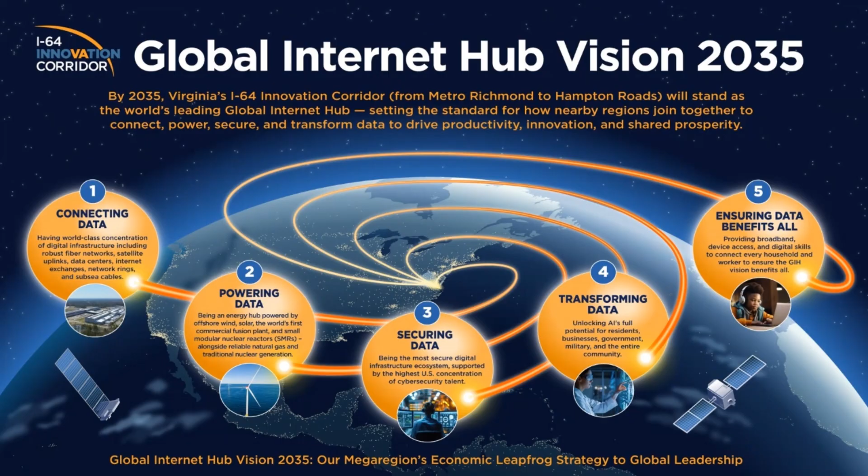Our top priority is to spearhead efforts to have the I-64 Innovation Corridor designated as a global internet hub. Our plan is a bold and innovative approach to harness a once-in-a-generation opportunity to transform the future of the Richmond region and Hampton Roads. In November, we unveiled our leapfrog strategy, which we call the Global Internet Hub Vision 2035. This vision is the future of the I-64 Innovation Corridor. The plan showcases where and how the world's data connects, how it powers up, how it stays safe, and how it transforms and benefits everyone.

On the other side of this map plan is why our leapfrog strategy is so very important. It's because today, comparison regions are outpacing us in GDP growth - gross domestic product growth - across all sectors. Regions with strong digital infrastructure consistently outperform the U.S. average in innovation and competitiveness. Digital infrastructure is a major driver of productivity and GDP growth. Our leapfrog strategy is not just to catch up, but to move ahead. Standing still means falling further behind.

We also are advancing the Global Internet Hub cause in many other ways, such as by generating earned media, writing letters to members of the General Assembly, and placing op-ed pieces. We also created an online digital infrastructure and data center information hub. This resource center seeks to offer clear, accessible insights and information into the digital infrastructure ecosystem to better equip local leaders, stakeholders, and the public to engage with and help guide this very vital sector.

You can check out the Resource Center at globalinternethub.org/resourcecenter. We're also showcasing the positive economic ripple effects of data centers by creating short videos of executives and industry leaders in Virginia talking about the economic ripple effect throughout the economy. You can watch these three videos on our website under Beyond Data Centers.

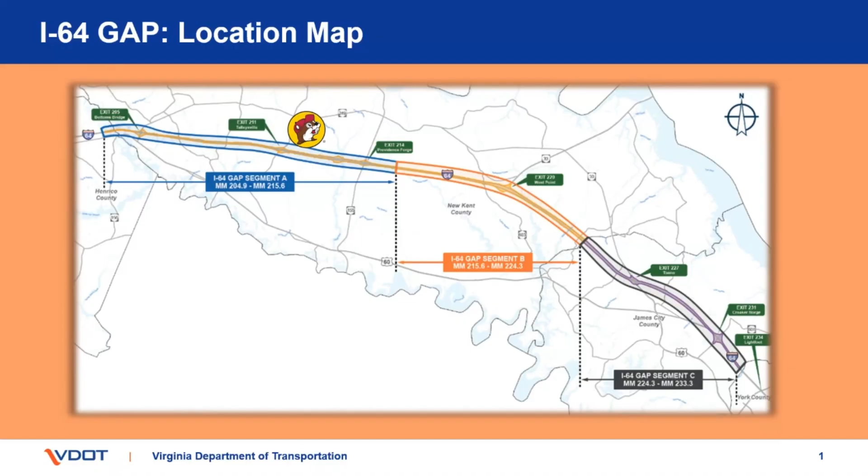And the GAP project itself is comprised of 3 segments, A, B, and C. A started first, C second, and then finishing up here with segment B. Ultimately, A and B are in New Kent County, and then segment C is in James City County, but all in all it's comprised of about 30 miles worth of widening here.

Getting into the major items of work, we are ultimately in the final configuration constructing a new general purpose lane with 10-foot paved shoulders. That's a wider facility to help with beach traffic, incident management, and overall congestion along the corridor, but it also provides benefits for hurricane evacuations if something starts approaching the Hampton Roads area.

Really critical in the network, as Greg mentioned, a choke point. We're hopefully going to alleviate that with this project.

Two other things I want to bring up here are the bridge widening and rehabilitation. That changed slightly across a couple of the segments - we'll get into that in a second, but just be mindful of it. And then ultimately also the sound barrier walls in A and C.

You may have seen in your commuting or travels that we're putting 2 of the 3 walls up right now on GAP A. They have a pretty cool dogwood and cardinal medallion on them that we think is actually pretty slick. And this picture - traffic is actually driving on this bridge. This is westbound at Courthouse at 214 right now.

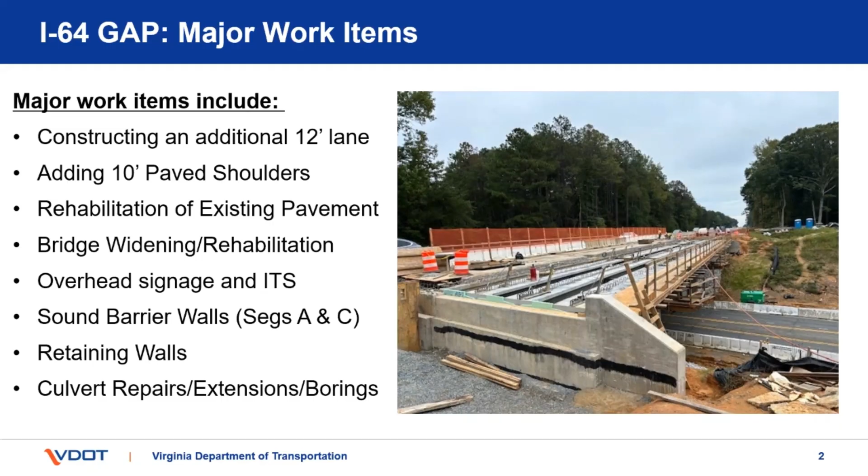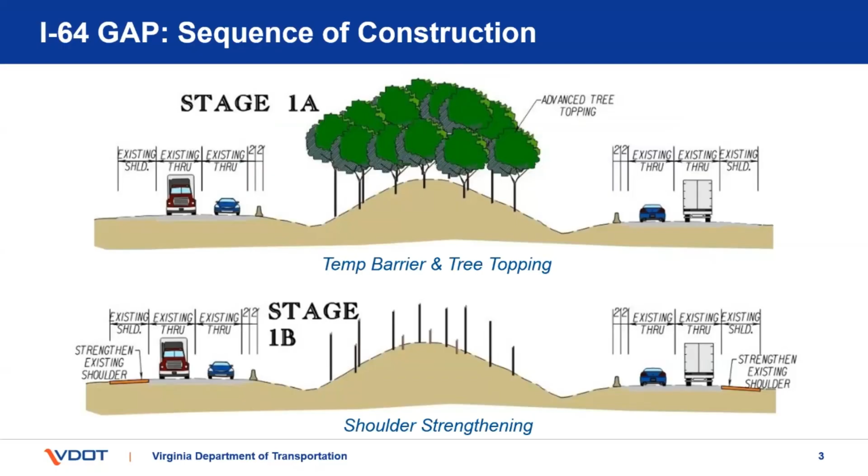Jumping into our sequence overview - this is from GAP A, but it's very similar across segments with some nuances. Starting with tree clearing and progressing into where the meat of the work is in stage 2, where we're working in the median, installing the widening, as well as a lot of the drainage and E&S, which is erosion and sediment control for those who don't know, with traffic on the outside and a barrier going through there.

And you have the barrier going through there. More or less, a lot of the projects are in this phase right now.

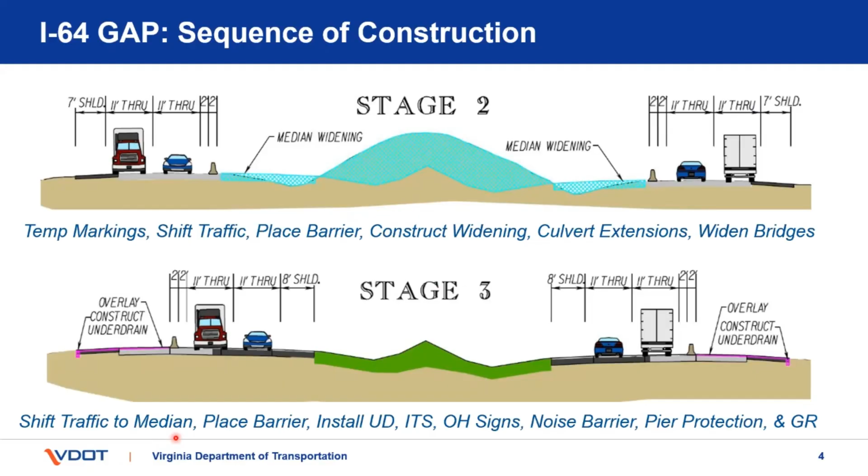Then we jump into stage 3, which is where we shift traffic to the inside and then get on the outside and do more of our mill and fills with the asphalt and resurfacing, as well as ITS, which stands for Intelligent Transportation Systems - noise barrier, overhead signs, etc.

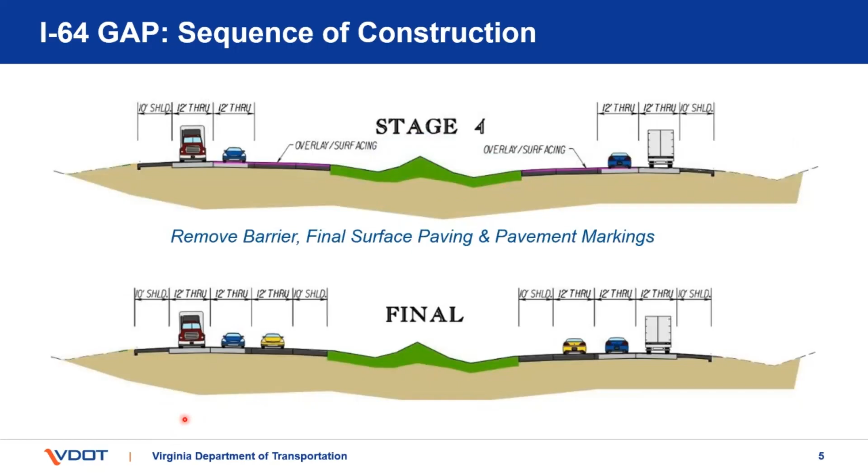And lastly, getting into stage 4, which is our resurfacing and making everything look pretty, and getting to final completion to where we ultimately hope it looks something like this. That's the vision in my head right now, and that's what we're working towards on the 3 segments.

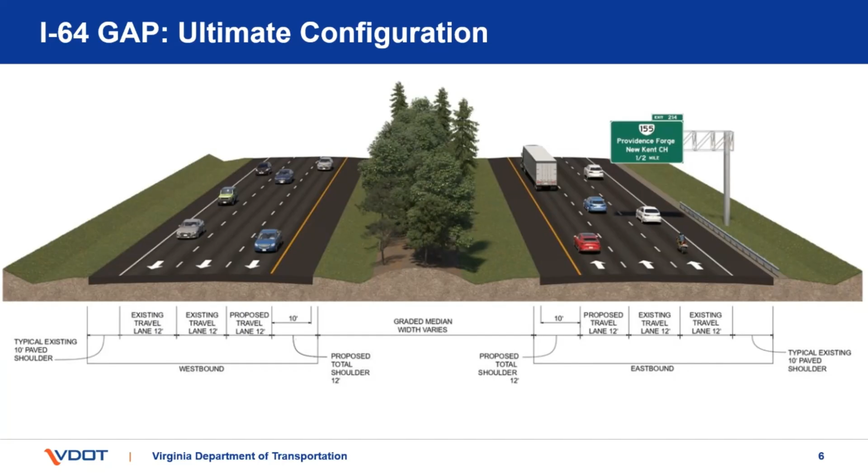That was a structurally deficient bridge that was in need of some heavy maintenance. Don't worry, it's still safe to drive on being structurally deficient, but ultimately needed replacement. So we incorporated that into the project.

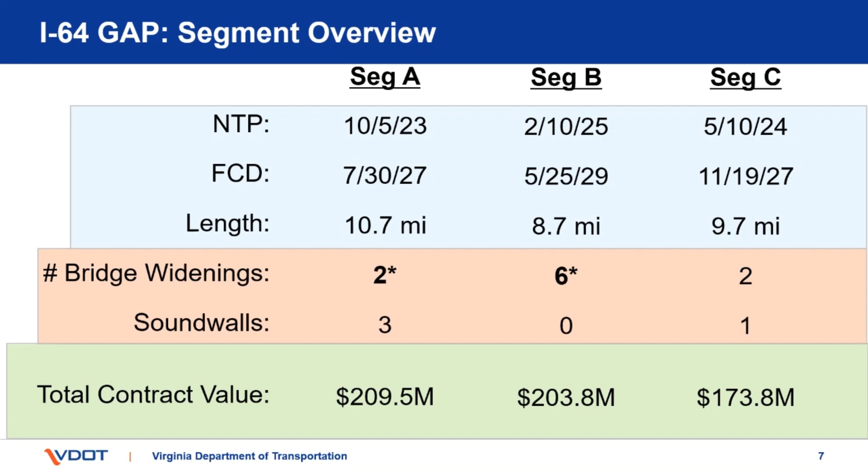As well as Gap B, instead of the widenings, we are actually through enhancement and/or change order going through and replacing all 6 bridges incorporated into that project. These were the original contract values - we really felt like we got good value with that, but ultimately they're a little bit higher than those contract values with a couple of the change orders that I just mentioned.

Jumping into segment A breakdown, there are 2 unique milestones on it. Visualizing them, number 1 is on the western side of the project, and number 2 is on the eastern side of the project for the gap limits. That's going to help offset some congestion a little bit earlier, and also the transition into Gap B.

Getting into the budget, we had about 66% expended already on Gap A, as well as 70% of the days. Just the discrepancy there - that doesn't mean we're late. It can vary based on cost loading of the schedule, et cetera.

So getting into the meat of it here, wanted to provide a different perspective than maybe you've seen just driving through the corridor.

Ultimately, this project is split into about 4 sub areas. We're in area 1, the far western side of the project. You can see we've shifted into stage 3, with sound walls coming on either side here, continuing down for a little ways.

Ultimately, we're making good progress here. You should see us start switching traffic here by the end of the summer. I would expect all phases and segments to be incorporated into stage 3, which is traffic on the inside and us focusing on the outside work.

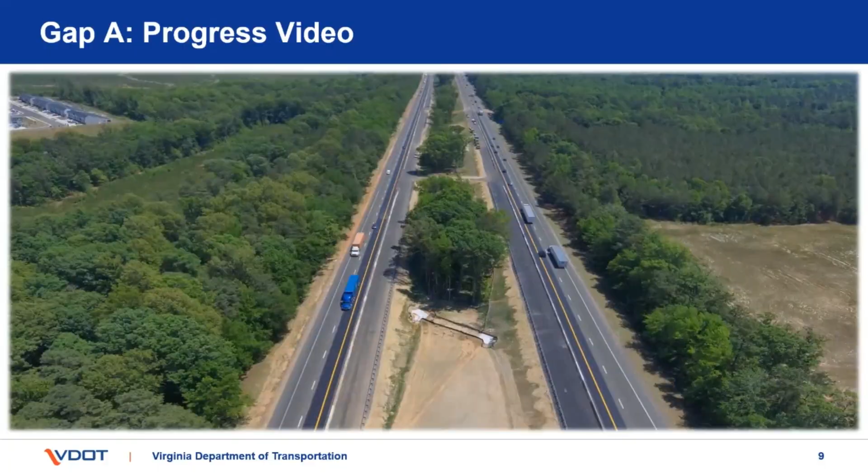About 104,000 tons of base mix, maybe a little more, are anticipated to be used for just Gap A alone. Perspective wise, all of Richmond District's paving work is about 500,000 tons. So just one layer for one segment is 1/5 of our total asphalt production in the district. That's pretty wild to think about, and it gives an idea of how big these Gap projects are and how much material is used.

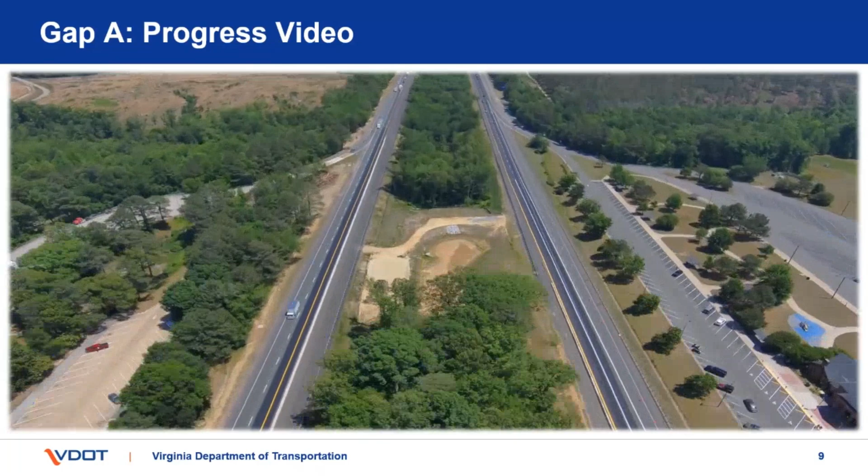Also touching on the Emmaus replacement, we should start seeing traffic shift over to the phase 1 bridge that was created in the next couple of weeks. Ultimately, we will replace the second half of that bridge. That's a good milestone to be attacking here.

And lastly, this is going through area 4. We are actually doing a final shift in area 4, or at least in stage 3, here tonight. So we will be advancing some more of that into stage 3. So a lot of progress on Gap A.

Getting into Gap C breakdown, we've got 3 milestones there, one of which was the park and ride. Some people on the call may have used it at this point - it's open to the public. We also have milestone 2 and 3, which are on time and progressing nicely. You'll see in the video the flyover, both western and eastern ends are looking good there and are pretty far along.

Budget wise, just a couple statistics: 65.1% from an earnings perspective as of May 1st, and ultimately, time perspective, 59%. So you see this one skewed the other way. Doesn't necessarily mean early, but it ultimately shows just good progress.

So getting into the video. Ultimately, last summer, you guys traveling through may have thought we stopped on the project. To some extent, we did - we have a time of year restriction just for clearing, so we could not clear until, or get back to clearing until August 1st. So I would say at that point we were full go August 1st, 2024.

As you see us navigating through here, you see a lot of work has happened, and it's only been, at this point, a little less than a year that we've been full steam ahead from the construction side of Gap C. So they're doing really well there.

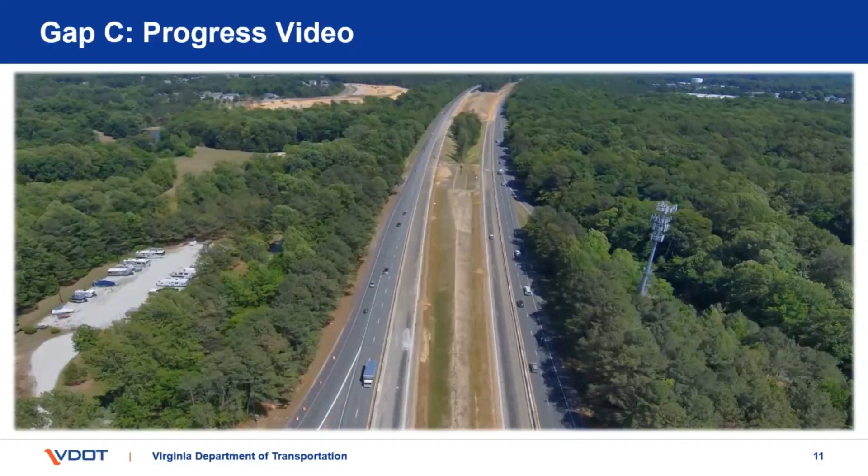Ultimately, as we travel through, you see the median is a little narrower, so there's some tree clearing where we've had to clear cut the median. It's just the nature of the dimensioning, but where we could, we've tried to retain some of the trees there, just to help the beauty of the corridor as we continue on through.

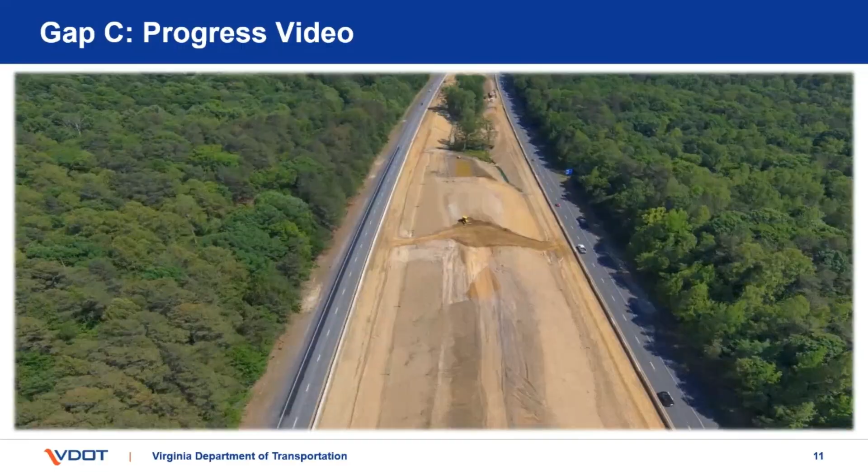Some things to consider: I gave you some stats before, but ultimately 19 basins and 10 sediment traps, and this one in the temporary configuration have all been completed. We're about 50% of the way through some of our cement treated recycled asphalt.

Some of those blacker, grayer areas behind the barrier, that's where ultimately those are. Here, they're just more or less boxing out for the roadway right now.

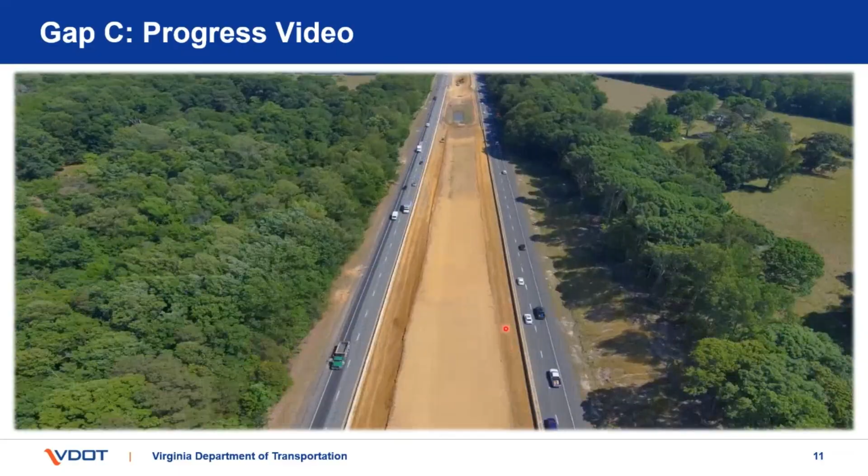A pretty exciting milestone is we just started last week placing asphalt out here on Gap C, so that's moving along quite nicely as well. We've also completed a lot of the pipe work and box culvert work through here, which is exciting from a construction perspective to get out of the soil.

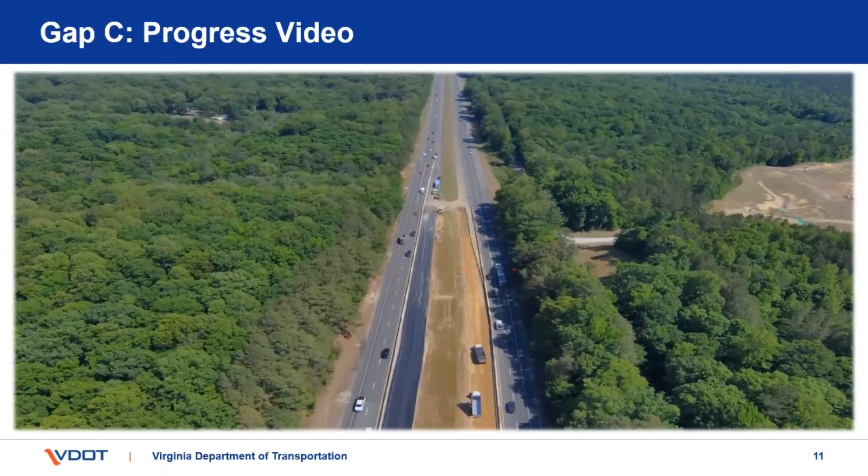And ultimately, the gas company is on the project relocating a gas line, so hopefully we'll get that opened up here in a couple months' time.

Moving on to Gap B, we have one unique milestone here: the early opening of 3 lanes, about 5 miles. To get your bearings, that's from 220 to about the 215, or the Gap A limits, traveling westbound. That'll probably be one of the last major choke points with the ramps and merging traffic, so it'll be nice to get open.

Obviously, Gap A will be, or hopefully be, open before that 2028 time period.

On the contract specifics, 17.4% has been expended to date and 31% has been time-wise expended to date. The disparity is chalked up to what I talked about before, but also some complexities with environmental permitting that were unplanned. We expect those numbers to join together here in short order.

So we'll be quicker on this one, it's a lot of a similar vibe. You can see it's a much earlier project in the onset here. We've just started construction, doing some clearing in some areas to start attacking the milestone.

We're also hit on this one by a time of year restriction for clearing, so clearing has halted until August 1st. But ultimately where we can work, we are putting in environmental controls, basins, traps, and whatnot to ready for the widening work that's going to go.

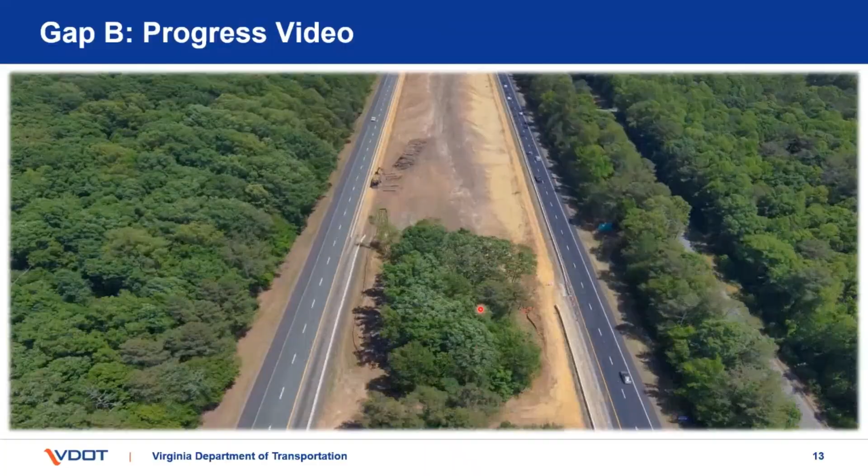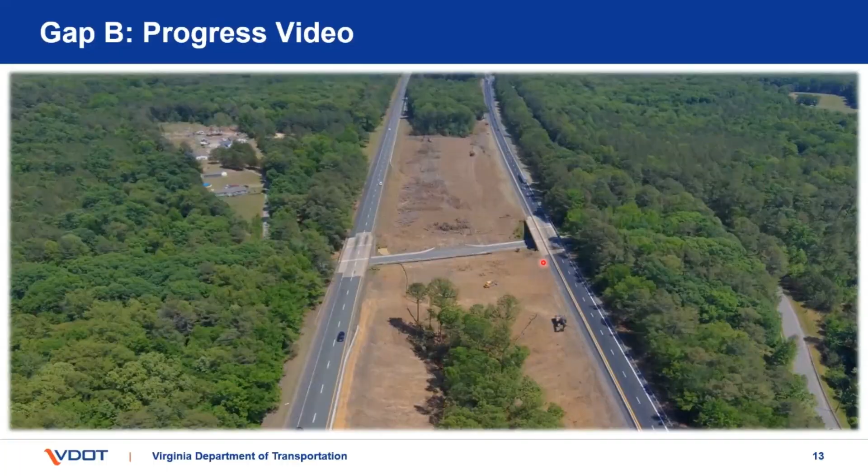One thing I'll note is over here you can see darker pavement compared to westbound. The contractor or design build team elected to pave the existing roadway first, at least in the intermediate course. They will come back and top it, but that should provide a really nice ride through the summer months and the rest of the course of the Gap projects.

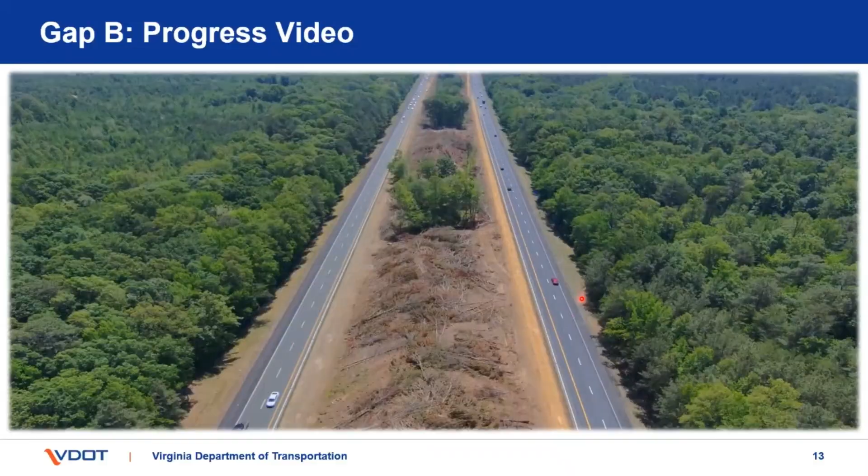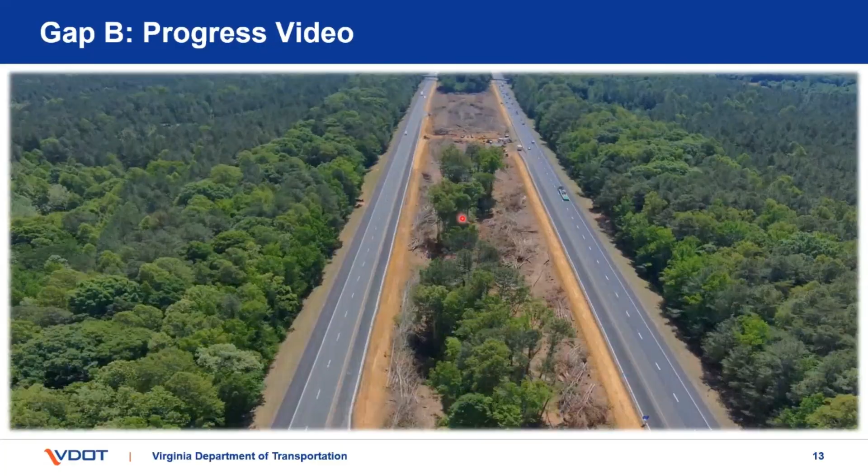They will get to the rest of it. They've just finished eastbound, I believe, a couple nights ago, and are switching around to go westbound, doing the barrier shift as they go. So we're going to stop here, it's a lot of rinse and repeat.

So that was the Gap B status slide. A lot of these are bridge replacements versus bridge widenings. The design is complete for both roadway and bridge, which is a really nice milestone. We're waiting on one permit to come in, but we have most of the others, so we're really getting on the precipice of fully open and trying to knock it out.

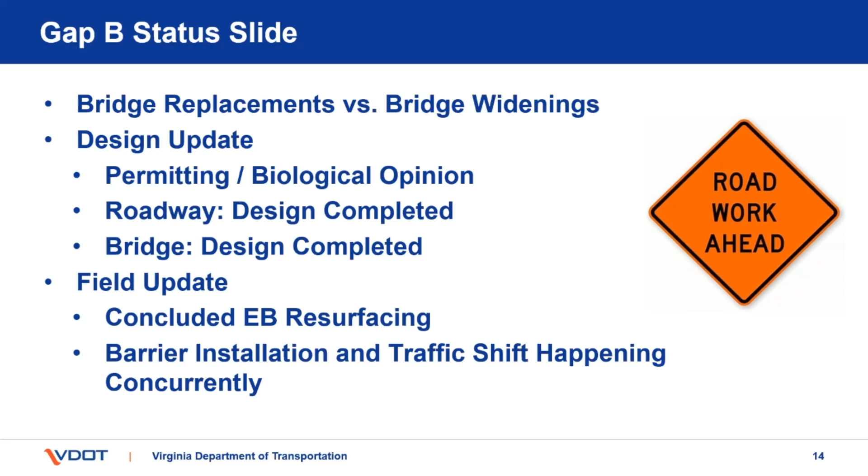Lastly, a field update: the eastbound resurfacing and barrier installation is happening concurrently as we progress through the project. And I think Greg said we'll hold questions till the end.

That's the update on the Gap, and I appreciate the time.

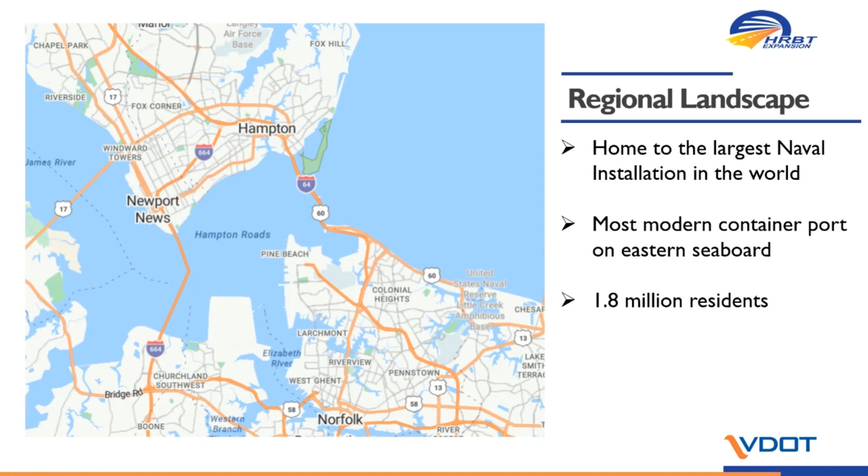So a lot of significant things in our region, and this project is really the gateway to some of those items. The project is more than just a tunnel - the tunnel gets a lot of attention, but we're really a 10-mile corridor from Hampton through Norfolk. We're expanding that corridor from the existing 2 lanes in each direction to 4 lanes in each direction - 2 lanes will be general purpose lanes, 2 lanes will be managed lanes in each direction. We're also rehabilitating and widening 20 bridges and completely replacing 5 bridges.

So the goals of the project are, obviously, increased capacity, reduced congestion, and most importantly, enhanced travel time reliability for that trip across the tunnel.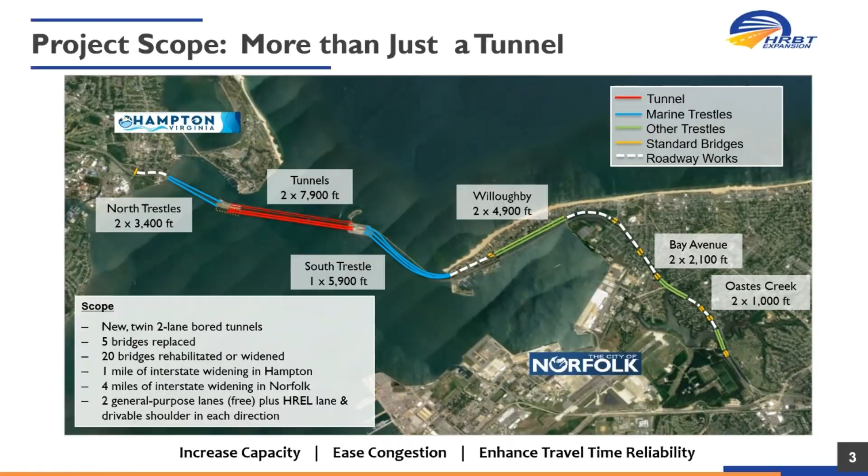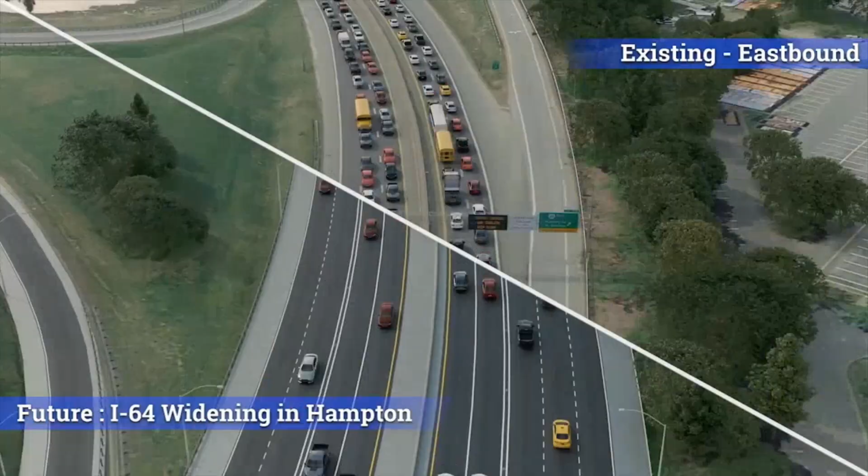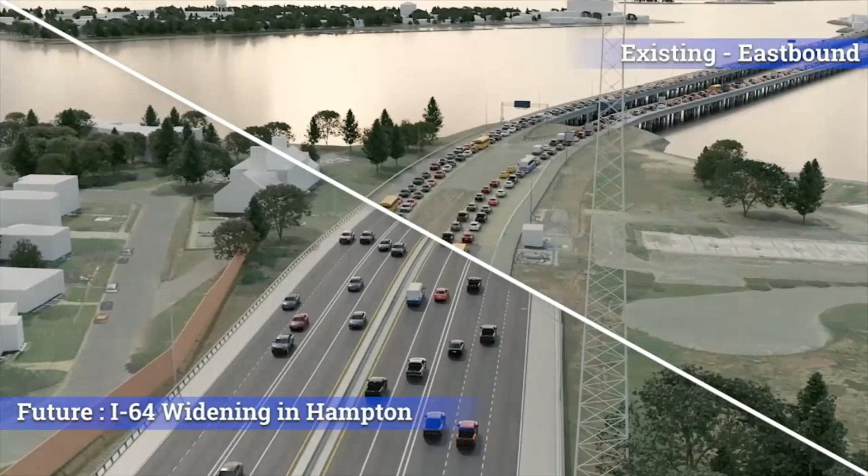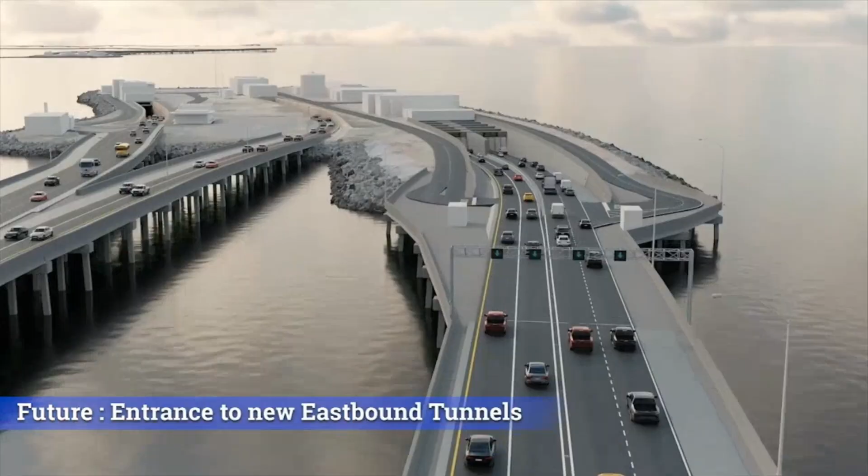So this is not a live look at traffic, this is just a simulation. It shows the existing corridor on top and the expanded facility on the bottom. Again, the right 2 lanes are the general purpose lanes, the left 2 lanes are the managed lanes. This starts on our Hampton side, going across the harbor towards the tunnel. You can see we're completely replacing the 2 existing bridges. The 2 new tunnels here on the right become the eastbound direction, and the 2 existing tunnels get reversed to be the westbound direction.

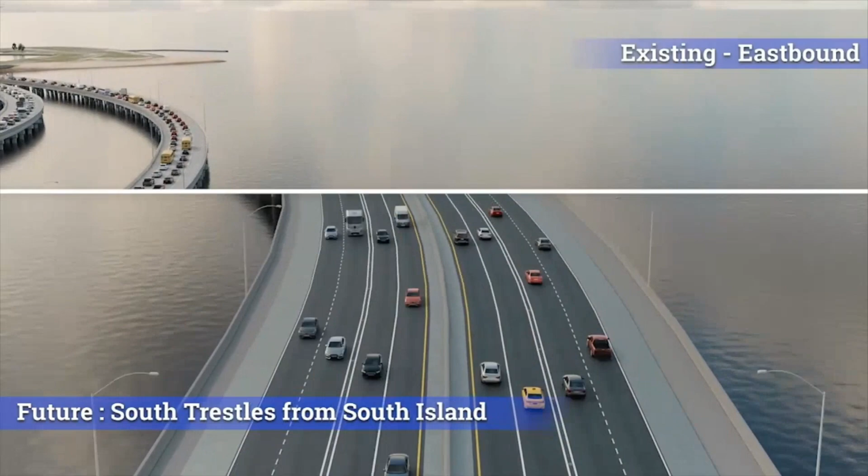And then coming out on our Norfolk side towards Willoughby, again we're completely replacing the 2 existing bridges with our 8-lane structure across, connecting onto land in Willoughby, where we carry this typical section all the way through the corridor through Norfolk. This gives you a high-level look at what the capacity improvements are.

Quick overview - again, this is a design-build project. Greg mentioned $3.9 billion; we awarded the contract back in 2019. The funding on the project is pretty unique, especially for a project of this size. Most of the funding, 92%, comes from HRTAC, the Hampton Roads Transportation Accountability Commission, which collects a portion of our sales and fuel taxes to put towards large projects in this area. So really that was the key to unlocking this project - it's been discussed for decades, but that funding really enabled the project to get off the ground.

The significance of the 8% state and federal funding - similar to what Eric mentioned about decisions to completely replace bridges - we could have widened some of our bridges, but they are nearing the end of their useful life, so the state decided to actually fund those complete replacements. That's the significance of the other 8% of the funding.

So this project, our 10 miles, is part of the larger Hampton Roads Express Lane network, which will be a 45-mile continuous network of express lanes. There'll always be general purpose lanes, which are free for travel, and then the express lanes can be used by a single rider with their E-ZPass to pay the toll, or HOV users or HOT-2 users with the Flex Pass for a free ride. We're the green segment here in the middle, part of our 45-mile network, that is in various stages.

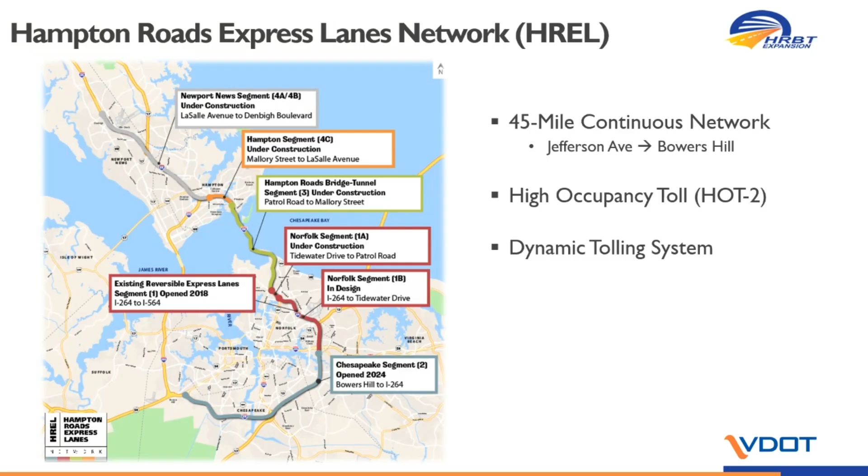The bottom part there is already online, and then the top parts will be coming online along with the HRBT project. Did want to start with the history of tunneling in Hampton Roads. This area has the largest collection of immersed tube tunnels in the world, currently 10.

This is how we've built all of our tunnels prior to the HRBT, where we cast the elements offsite, brought them to the area, dug a trench, lowered them, and backfilled them. So again, all of our existing tunnels have been built utilizing immersed tube technology.

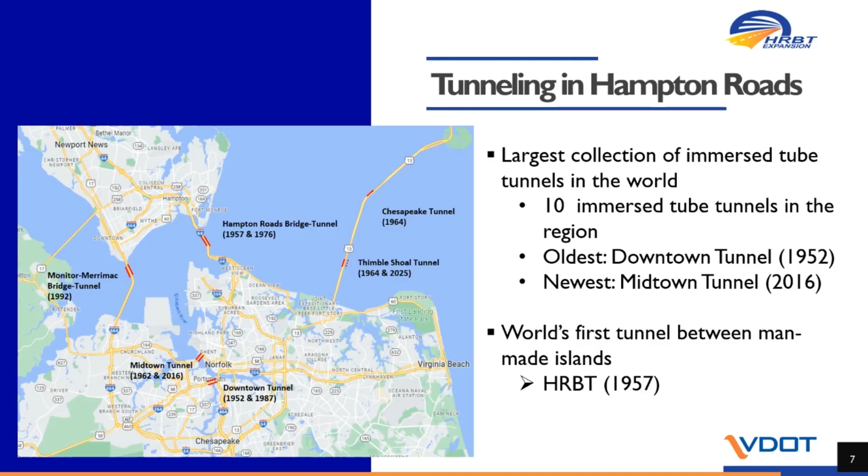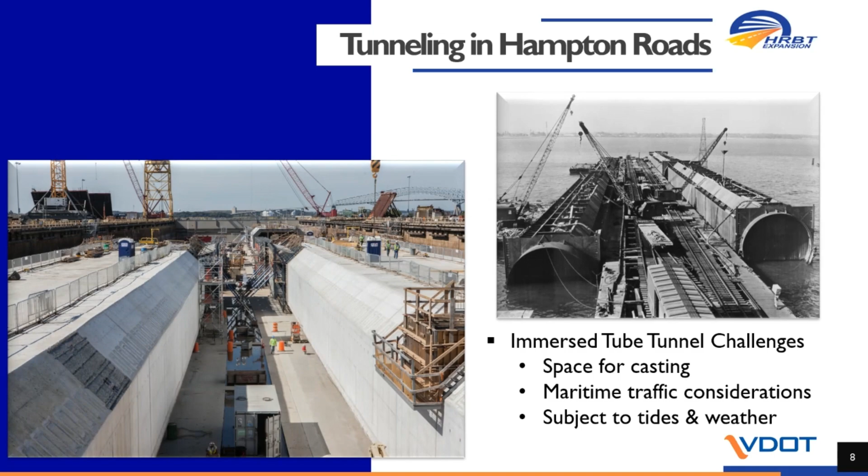To overcome some of those challenges, not just the elements and the impacts on the channel as you're trying to immerse them, the HRBT is actually using a tunnel boring machine. This is the first time in Virginia this has been used. The size of our machine, at 46-foot diameter, is the second largest TBM that's been utilized in North America, and only the third bored tunnel for vehicles, the first being Seattle and the second being Port of Miami.

Again, the main advantage is being able to work under the channel without impacting the waterway and all those ship movements. The machine was actually built by Herrenknecht in Germany. They supply most of the TBMs worldwide for these large projects. The picture on screen actually was the machine in Germany. It was fully assembled and commissioned before being disassembled and sent to the United States here on our project for use.

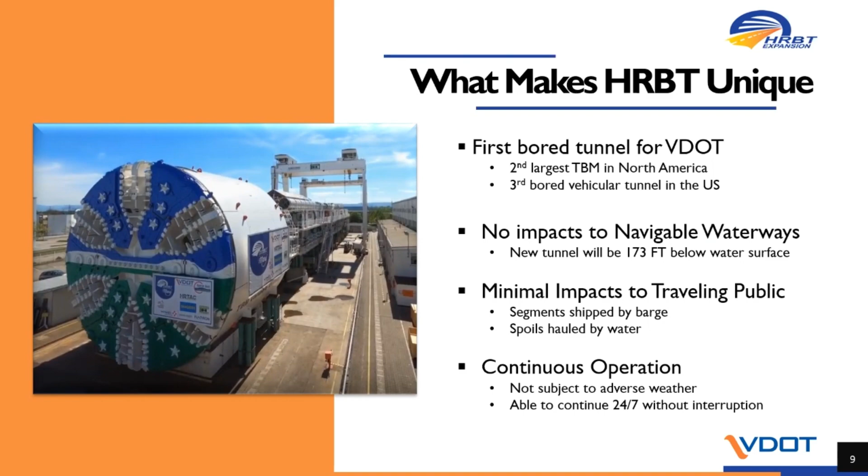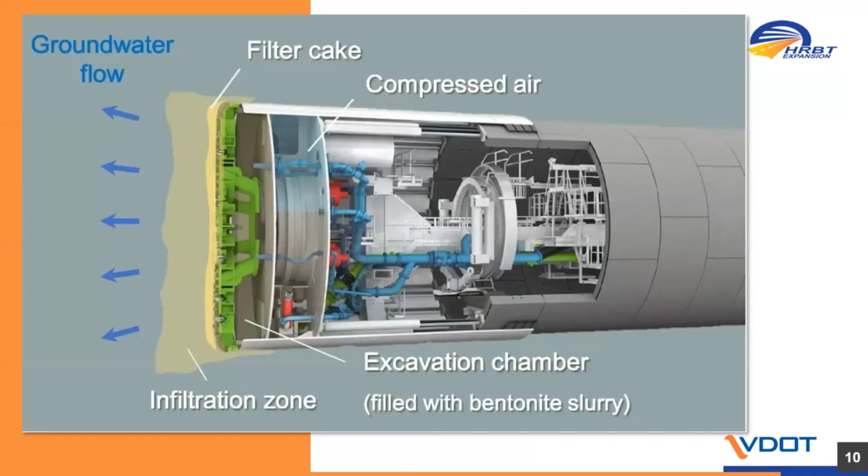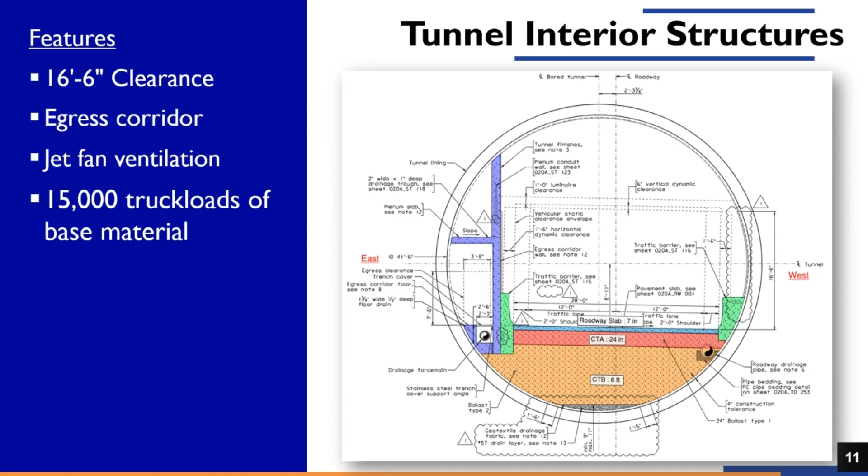On the left, this is one of the important features of the new tunnel: there's actually an egress corridor. There are evenly spaced doors throughout the tunnel that, in the event of any type of emergency, you can get into that egress corridor to make your way to either end of the tunnel and get back up to land. Above that corridor is the pressurization plenum, where clean air is pressurized. That provides a pressurized environment in the egress corridor so that even with the door open, it would push the air out and keep any smoke-filled air or other elements from getting inside the corridor.

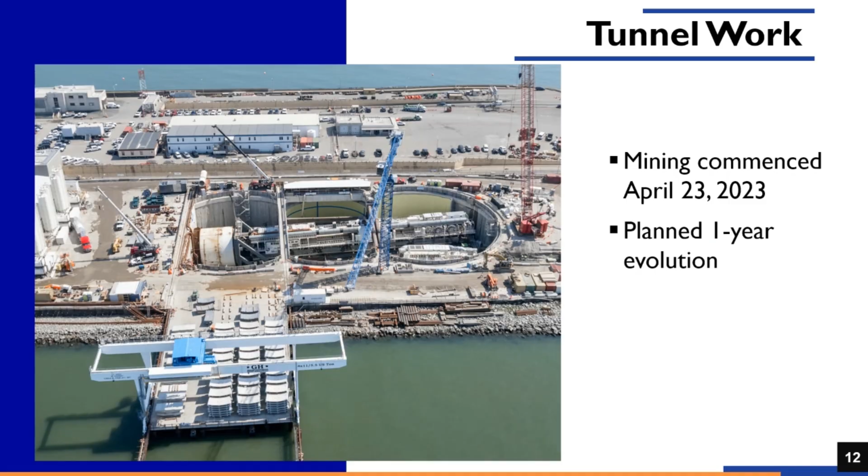The tunneling started back in 2023 when we commenced our mining for the first tunnel. You can see in this picture, at the bottom, that's our segment quay, where all of our individual segments were delivered that ultimately make up each of those individual rings.

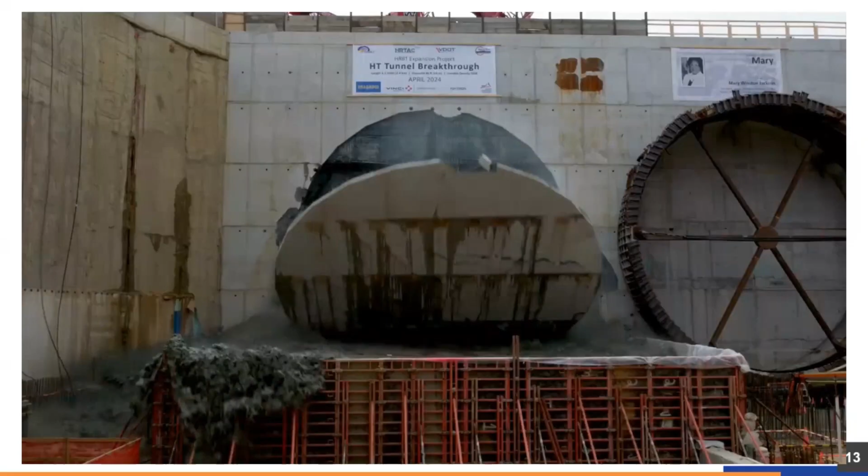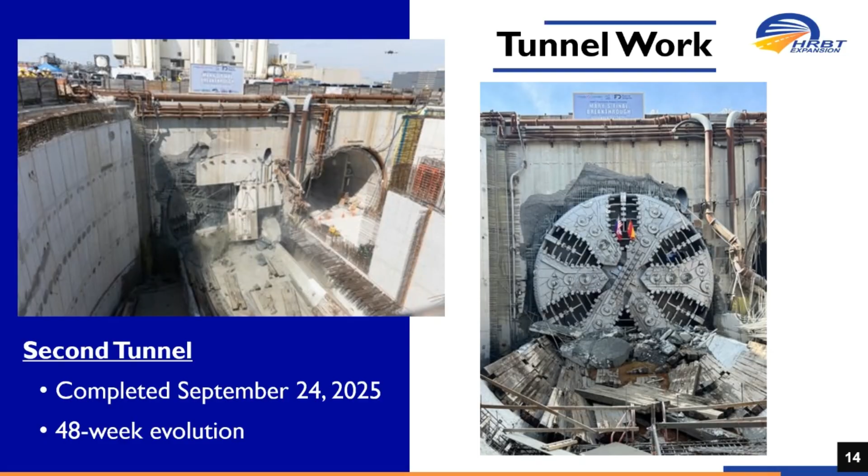So again, this was a big day on the project, big milestone for us. From there, fast forward another year, it took about 6 months to turn the machine around. We did a U-turn and started mining back the other way to complete the second tunnel. In just under a year, we completed the second mine, which completed both bored tunnels. Huge milestone for the project. Obviously, one of the large risk elements on the project was getting that machine underground and through with no issues.

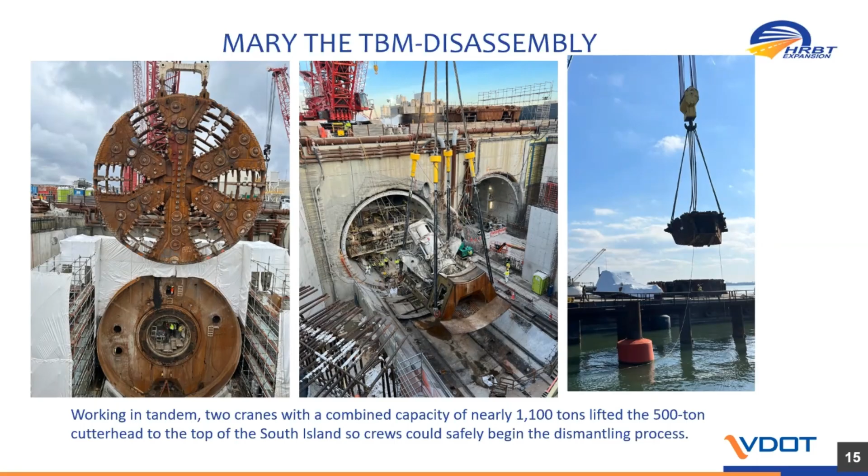Since then, Mary the TBM - we named her Mary, after Mary Jackson, depicted in the movie Hidden Figures, one of our local mathematicians, actually named from one of our local schools through a contest. Once Mary was done with the mining process, she was disassembled. So she's now fully disassembled and off of the project. Mary played a very important role in our project, but has done all her work.

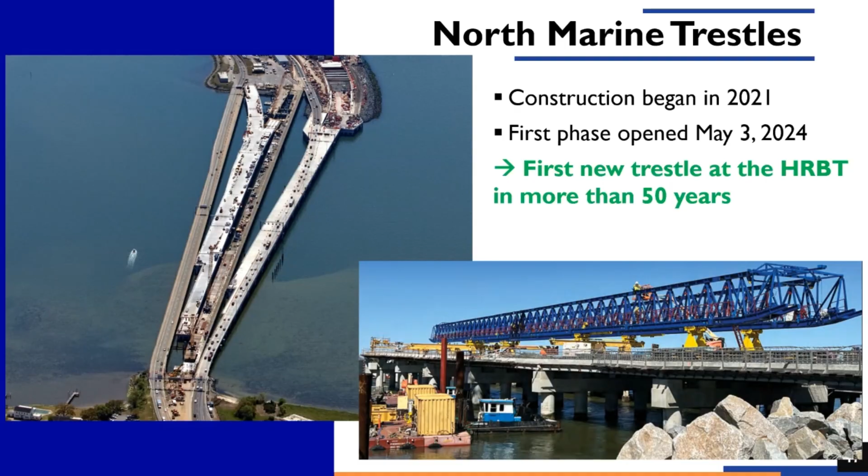So on the eastbound side, we moved the eastbound lanes over so we could demo the existing structure. And you can see on the westbound side, we are moving to open that structure to traffic later this year, probably in the early fall timeframe. Getting traffic onto that new structure will allow us to demo the old structure and complete those bridges and connect them to land there on the Hampton side.

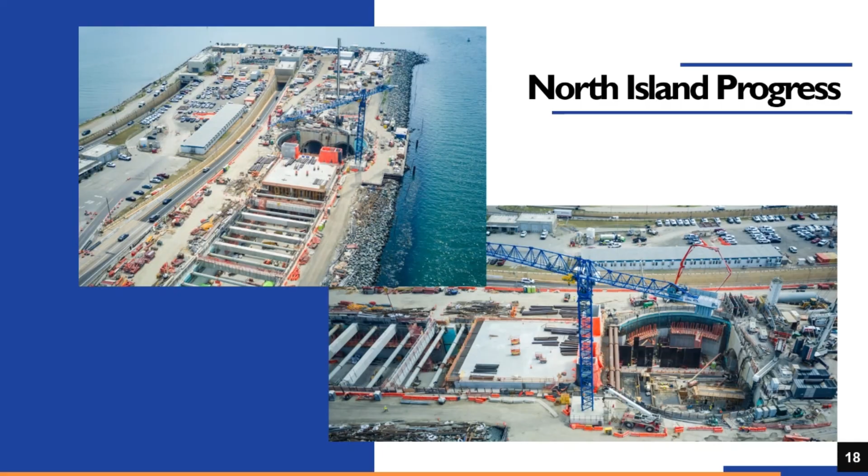Looking at our North Island progress - this is where that breakthrough happened in the video and where we turned the machine around. Really the significant activity here is you can see some of the buildings taking shape over top of those cells. Those buildings will support our switchgear, the electrical equipment that runs the tunnels. So the big focus on the project now is going vertical above where some of the initial works took place underground.

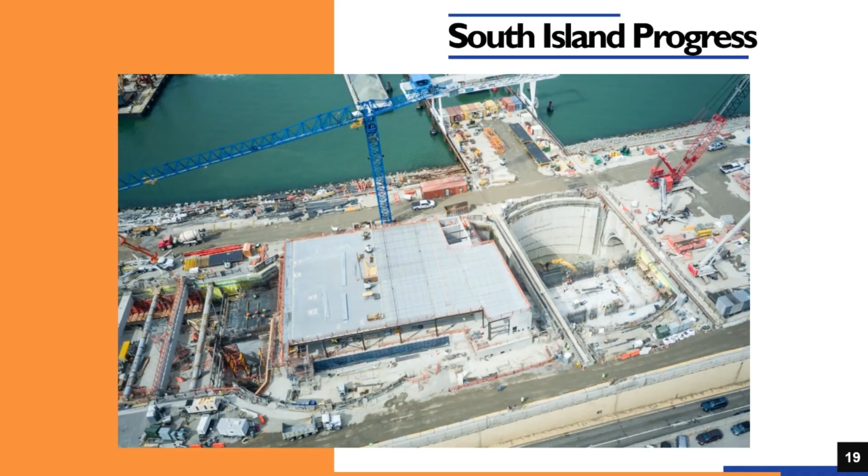South Island, similarly, we are going vertical with building construction. You can see in the cells, the top portion is where the machine broke through and came out, so that is still open where we had to remove the machine. We are now just starting to work on the roadway level to get that even with the other side next to it. So good progress on our South Island.

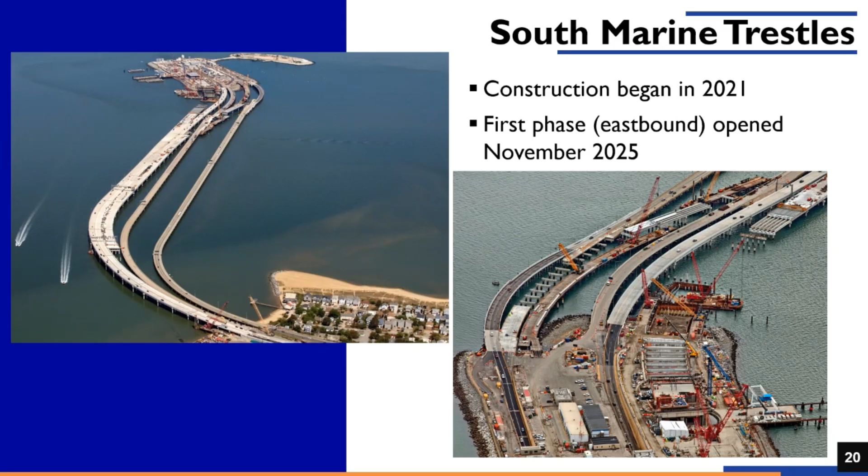At the top, you can see all the various tie-ins to the existing tunnel. On the left is where the main bridge will be coming out of the new tunnels, and to the right are what we call the fingers that will go into the existing tunnels. So a lot of very precise planning on those traffic shifts to be able to build the new bridges under existing traffic.

Opening up that median with the eastbound work allows us to progress the westbound work. Later this summer, we should start shifting some of the westbound traffic towards the median so that we can complete the outside widening. So a lot of progress going on through this corridor - if you've driven through recently, you can see the amount of work going on with the cranes in the air.

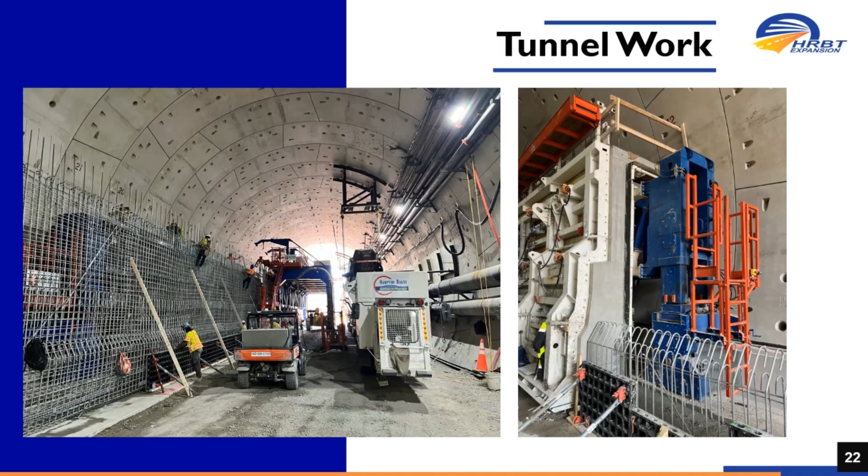Moving on to our tunnel work - really mining the tunnels was half the battle. We now have to completely outfit those tunnels. This shows the egress corridor walls going up. We talked about the egress corridor, and then some of the other work going on within the tunnels.

The second to the right, you can see some of the fireproofing board going up on the outside of the tunnel. That's a board that would protect the tunnel in the event of a fire, protect the concrete shell. So that'll go over all the exposed surfaces in the tunnel, the egress corridor on the right, and some of the utilities going through there. So again, a lot of work right now to completely outfit those tunnels.

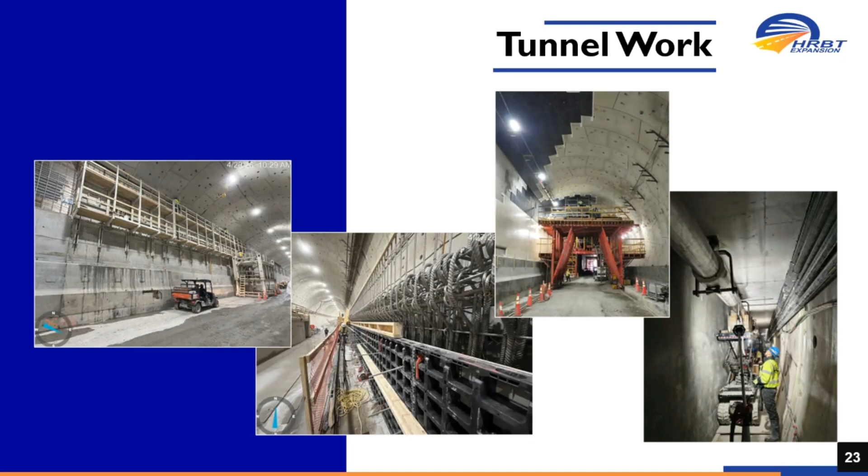After these elements, we'll also have all the traffic elements, the ventilation, the lighting, the ITS, all the systems going into the tunnel. So a lot of work left to do on that part of the project. We're moving towards the 2027 completion date. So between the landside work and the tunnel work, a lot of work to do there. This summer will be a big summer for us to progress a lot of the landside work so we can complete the major civil work, so we can commission a lot of these systems that'll allow us to completely open the facilities.

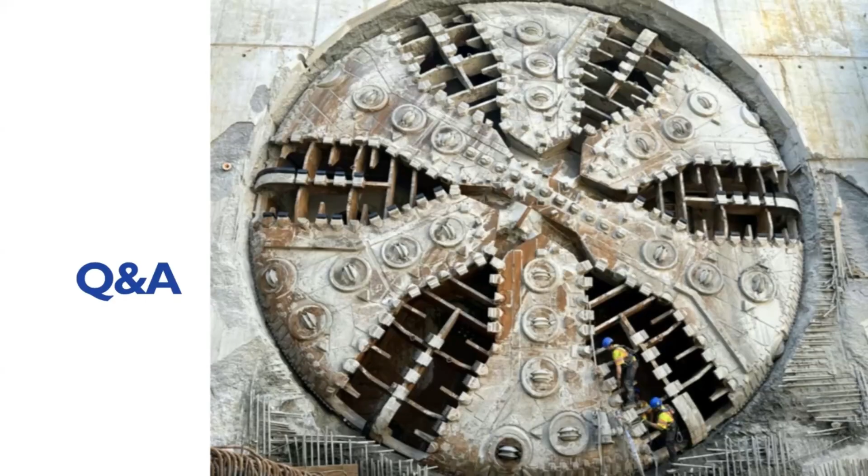We have a model of Mary the TBM. We have our own version of a love sign. A lot of people like to get their picture taken in front of that. So again, a lot of ways to stay engaged on the project and keep up with what we're doing here for the next year to complete out this project. So that's what I have, and welcome any questions that we may have. So turn it back over to you, Greg.

Hey, Greg, you're on mute.

That was really fascinating. I was telling my colleague Adair here during the presentation just how fascinating that you could bore under the water like that and create the tunnel using that Mary contraption. So thank you very much for that. Real quick for both of you, can you tell us what was the most challenging aspect, or has been the most challenging aspect for it? And Brad, when you have a chance, if you could stop sharing the screen, then I can put the screen up, that'd be great. But can you both just give us a thought about the most challenging aspects or the biggest challenges that you saw in these two projects?

Yeah, I'll go first. Maintaining traffic has really been a challenge. We made a commitment early on to maintain two lanes in each direction at all times through the project. Obviously we do have nighttime lane closures, but on the trestles, we actually spent a lot of time building temporary bridges to get outside of the alignment of where the permanent bridges will be. So especially on those bridge structures on the water, a lot of choreography and planning to keep two lanes of traffic alive while we're rebuilding those bridges. That's been one of the bigger challenges.